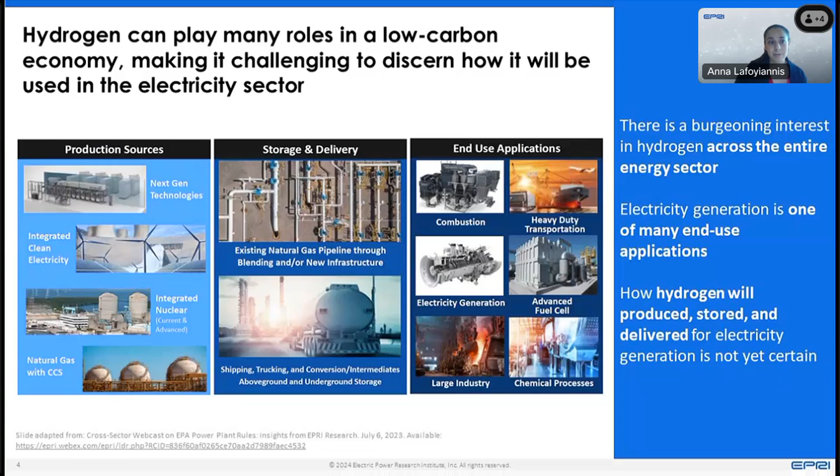And you see that come loud and clear when you start to look at national macroeconomic models. These models inform the potential for hydrogen deployment across numerous studies. I've only listed two here, but you see this all over: there is definitely a significant role for hydrogen in our economy, especially for hard-to-decarbonize sectors—think of something like steel production. But how much hydrogen, and its purpose, depends on the scenarios. There are a lot of uncertainties about cost and availability of supporting infrastructure, so it can get really confusing to look at these models and know exactly what that means for us.

And that's really the heart of our paper, because we really wanted to get a little deeper into what that means for us.

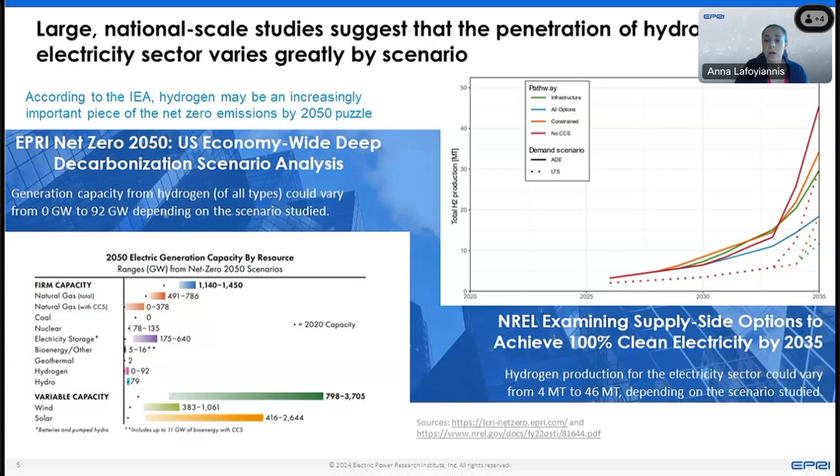So I'm going to go to the next slide and talk a little bit about some of the ways that hydrogen might be used. I want you to start thinking about where are those synergies, and what could we see in those macroeconomic models and what that might mean for my territory.

From those models, you see a number of technology options for hydrogen, and it's not just clean electricity. You can use hydrogen directly for ammonia production, steel - I'm in Ontario, so I'm all about steel - marine shipping, and aviation. These derivatives, because hydrogen is so light, can be incredibly useful for transportation. So wherever you are, you might be seeing some more uptake on hydrogen because of these other industries and economies in your region.

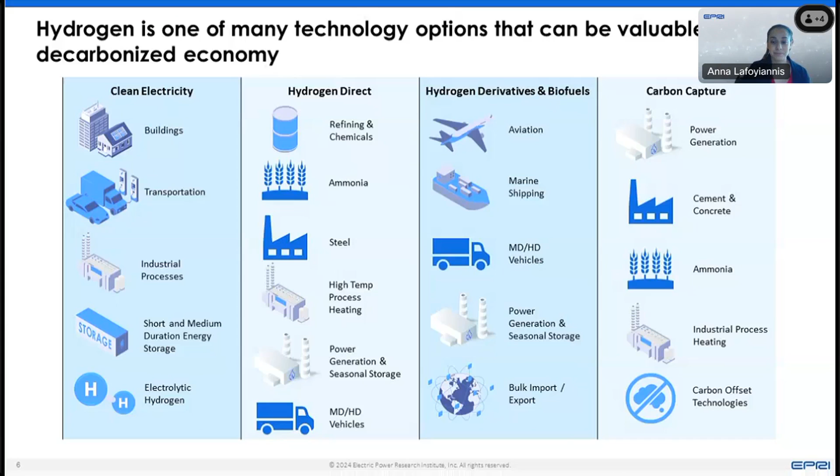These are a few diagrams telling you a little bit about why there's so much hype. It's hard to go a day without reading something about hydrogen, and it's because the momentum is really, really strong. These sources I pulled from the IEA and from the Hydrogen Council, and no matter the source, you don't have to be super specific about the numbers, but what you see is that the number of projects has grown over the last few years and continues to grow.

You'll also note that the majority of projects are located in Europe, and that means that we have a lot of lessons that we can learn for those of us in North America from Europe in terms of the deployment and how to model it.

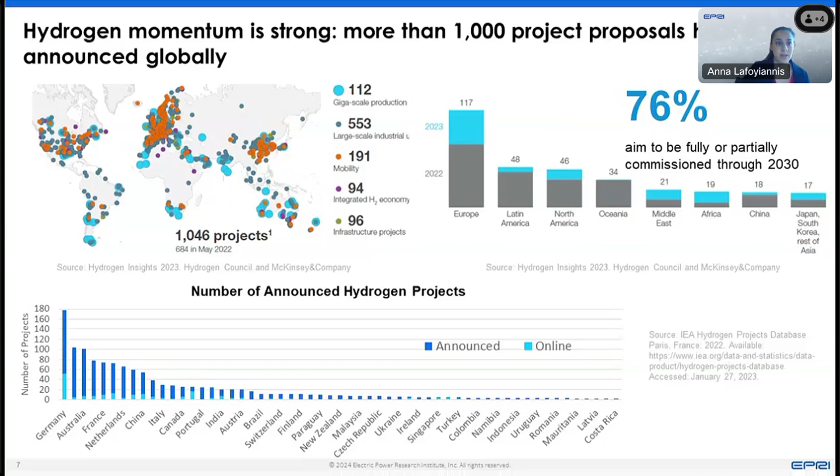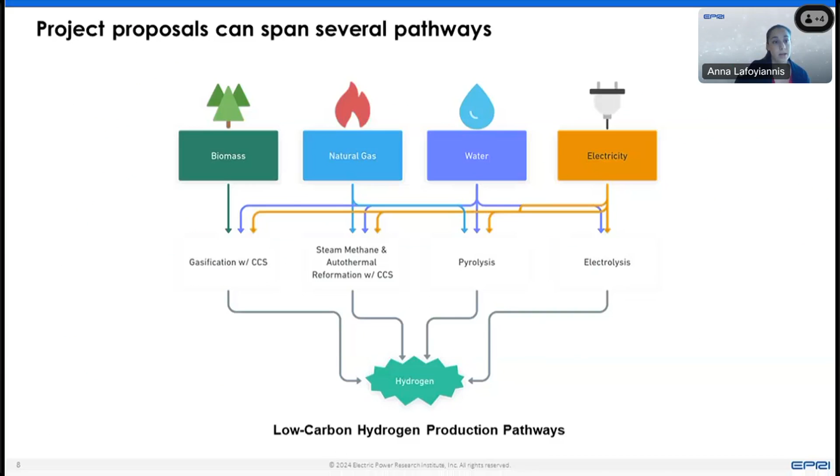That last slide, just a caution - a reminder that you can produce hydrogen a whole bunch of ways. So if you're grabbing information, you can't just assume that's going to come from electrolysis, because there's a whole number of ways. In particular, we see blue hydrogen, that's natural gas using steam methane reformation, and then attaching carbon capture. So another way of making clean hydrogen.

So just to say that, if you were to look at today's information, you might think that there's going to be a lot of blue hydrogen, but the deployment of electrolysis has grown. I love the picture on the left when you start to look at that growth, more than doubling from 2019 to 2022. And I'm sure as we start to see numbers come through for 2023, 2024, and so forth, you'll see it grow everywhere in the world.

So a large amount of growth is coming in North America - it may very well surpass the growth that we've already seen in Europe. But also in Asia Pacific, in the Middle East, and Latin America, we see this potential.

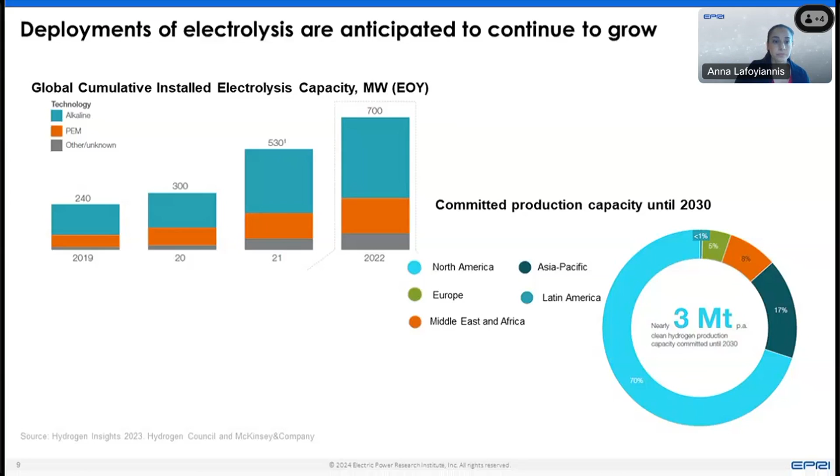All right, so we've got this electrolytic hydrogen - it's likely to grow. Okay, what does that mean for the power sector? One way of looking at this is to look at integrated resource plans, and look at how the utilities are looking at it and see what their perspectives are. And last year, I did a little study

looking at 115 integrated plans across America. I wanted to know whether they've incorporated hydrogen in their plans as an option, and what benefits they might think there are. What I found is that it's very early days - only 33 list hydrogen as an option in their utility planning process. When they do, it's primarily to replace coal or gas units, so vis-a-vis, you're thinking about emissions reductions. But they also acknowledge that it could be an important piece of the puzzle for a lot of grid services.

And flexibility is certainly one of those, listed by many, but also long duration energy storage - think of that shifting from season to season, talking about it as a resilience or fuel diversity benefit. So in short, they want to reduce their emissions and they want to ensure they have a dispatchable resource to support system reliability. Some people call this a unicorn, but maybe it's hydrogen.

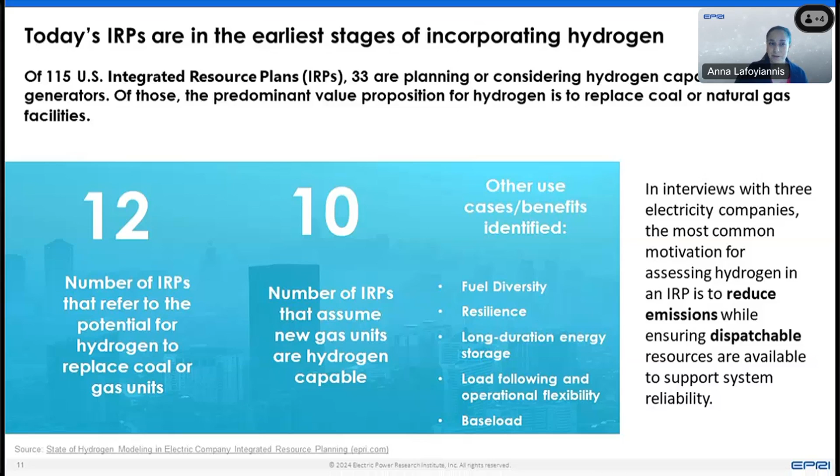One of the things that I didn't see in this review, and I always think about what the gaps are, is the nonlinearity of hydrogen to emissions reductions. And the reason I thought this was kind of curious is that a lot of these have talked about the potential to use hydrogen blending - what a cool option, to use a fuel and blend it with natural gas as a transition.

Like I said, that nonlinearity didn't show through. So for a utility to get the most benefit in terms of emissions reductions, they will need to factor this nonlinear curve into their modeling. They're likely going to find that they need to blend a significant amount of hydrogen into their gas units to get the most emissions benefits, and this might take some time.

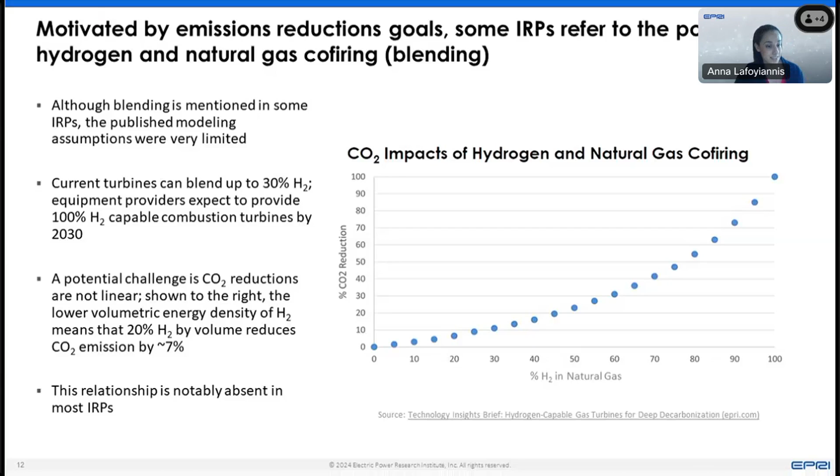So let's talk about policy in context. I think it would be really incomplete if I didn't talk about this wider environment, and I would risk downplaying the role of hydrogen in the absence of talking about policy, tax incentives, and stakeholder interest.

Last year at EPRI, John Beislein did some work looking at the IRA in the US and what it might mean in terms of hydrogen price and deployment. You can see that it can significantly change the types of resource or types of hydrogen that is produced. It might lead to more electrolysis.

Really, what I take away from that is realistically, we're going to have hydrogen in almost every territory. And as long as there is some hydrogen, any power system modeler should be asking: how can I make use of that in a really beneficial way? What are my synergies, and how can I make sure I use it to the benefit of being cost effective and reliable, which is what we all care about.

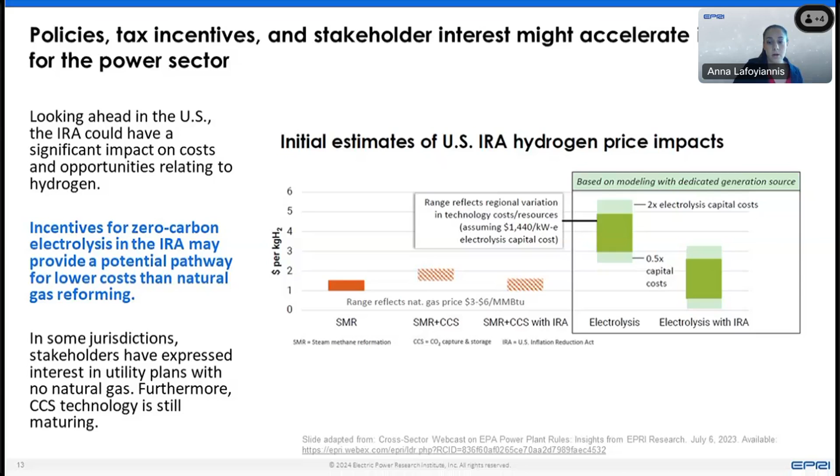At the same time, there's this potential to use hydrogen for other markets. I talked about being from Ontario, and steel is a very important part of the economy I grew up in. If I were sitting in Ontario, I'd be thinking about the synergistic effect I can use—is there benefit and locational benefit from other sectors employing hydrogen, and perhaps getting flexibility from hydrogen production, using it as a demand flexibility resource? So we have to shift and understand that all of this means there's going to be different ways of modeling depending on your territory and how it's deployed by everybody else.

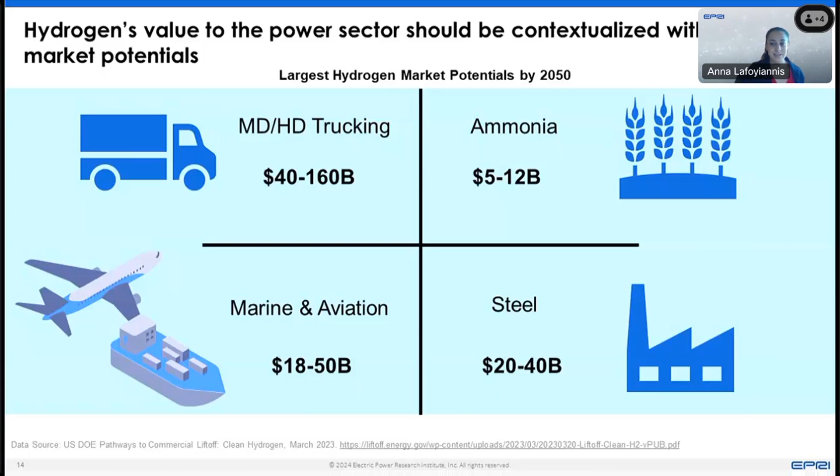So you get one last slide from me before I hand it over to Maren. She's going to dive a lot deeper, but I think this is the most exciting part.

If you haven't already read, ESIG now has two reports about hydrogen, with a few really important quotes that get me so pumped. Most importantly, hydrogen can provide much needed flexibility to the system when other carbon-free resources are not available—think of them as a peaker, think of what they could do during dark doldrums or those reliability events that get a lot of us nervous. As a result, it might be the key to reaching 100% net zero electricity power supply.

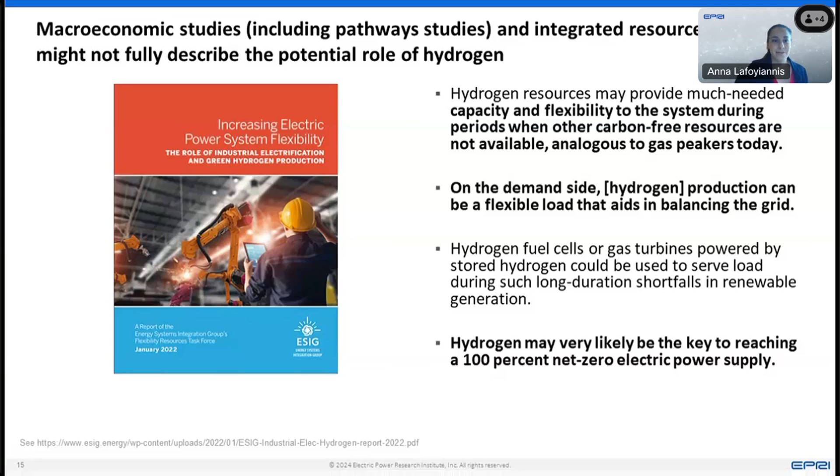My goodness, how exciting. So with that, I'm going to hand it over to Maren to talk about how to do this. Thanks so much, Anna, and thanks for the nice introduction.

In this section, we want to talk about some of the key takeaways from our report—feel free to go to the ESIG website to check out the report itself. What I want to talk about here is what you should be considering when modeling hydrogen, what types of flexibility to consider, what could be the role of hydrogen in the power sector, and lastly, more recent work on possible participation models for hydrogen.

Starting with the next slide, I wanted to give an overview of the types of models we're talking about in general. In power system modeling, there are a lot of models involved, and they typically answer specific questions. For example, we have large-scale pathway models that look into the future, trying to get a good view of the economy at an economy-wide level, taking into account things like hydrogen policies or tax benefits and how those may impact technology choices.

Those technology choices are then typically picked up by a capacity expansion model, which focuses on a more granular level in a smaller geographical area, including more detail at a unit level. But as you can imagine, those models are rather computationally expensive, so they're typically not equipped with a whole lot of temporal granularity or detail.

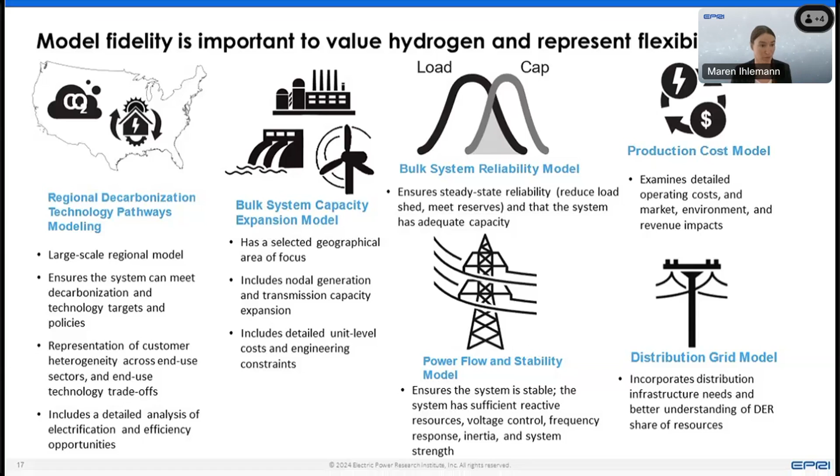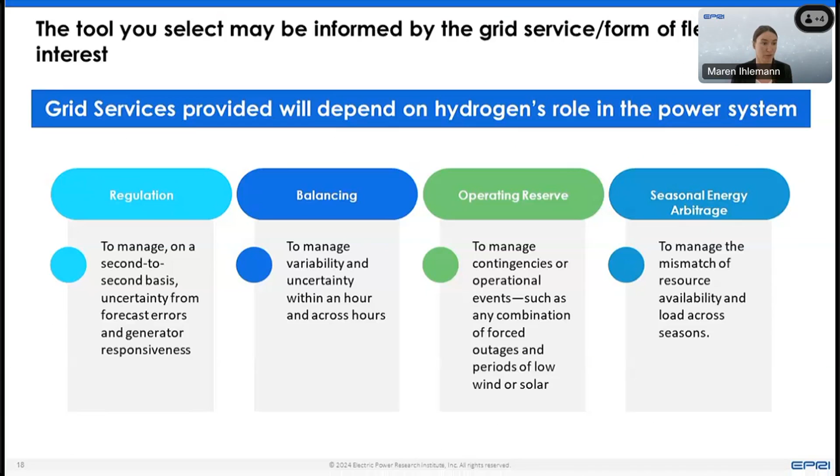On the next slide, I quickly summarized what kind of flexibilities we were talking about in our report, which range from regulation flexibility on a second-to-second basis, to balancing provisions, operating reserves, and then on the other end of the spectrum, seasonal energy arbitrage. This will depend on what role you want hydrogen to play in the power system, or what you identify as the role of hydrogen for your system. And the role of hydrogen may actually not be so clear.

Thanks, Anna. Next slide, please. What we quickly found when working on this report is that not everybody is necessarily speaking the same language.

Some people talk about what we label here as exogenous hydrogen demand, where we assume hydrogen is produced via electrolysis but then used elsewhere outside the system boundaries. The opposite is also found in some studies: exogenous hydrogen supply, assuming similarly to natural gas that hydrogen is part of the power system and can supply fuel to thermal generators. Lastly, bringing it together, we have endogenous hydrogen demand, where hydrogen is produced through electrolysis, stored and/or transported, and then brought back to the power system to provide power at a later point in time.

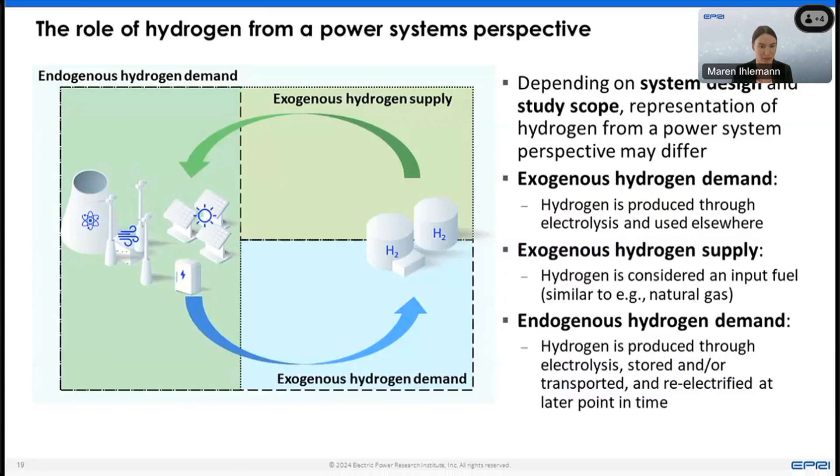Let's look at those concepts in more detail. I'll start with what we call exogenous hydrogen demand, where electrolytic hydrogen is produced and used elsewhere in the economy. We can realize this in our models, for example, with simply a demand time series, or possibly a price profile to incorporate price responsiveness, so we only produce hydrogen if it's economically meaningful.

Often electrolysis is also talked about as a flexible load. In this context, it could provide services like downward reserve by increasing hydrogen production, or upward reserve by decreasing production to alleviate system stress. As a teaser for later in this presentation, these flexible operations will highly depend on the electrolyzer type you have at hand.

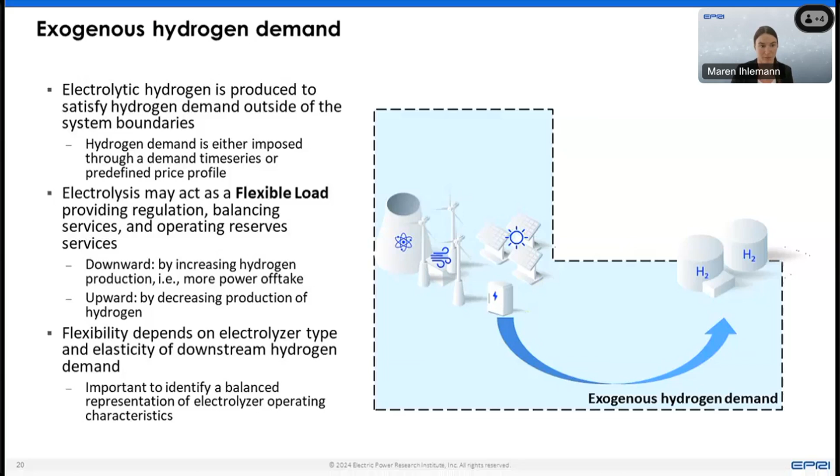So Anna will give us a brief overview of the key electrolyzer types and what the key differences are from a technical perspective. Moving on to the exogenous hydrogen supply.

I won't spend too much time on this, but basically we can think of this a lot like a thermal generator, so from a modeling perspective the challenges should be rather small. It's actually found in quite a few integrated planning models—another teaser to some of Anna's previous work reviewing integrated planning models, so feel free to reach out to her if you want to know more.

From a modeling perspective, the only real thing to worry about here is how we can track hydrogen in case we want to look at its concentration within existing infrastructure—for example, how much we want to blend, and how we can make sure that's enforced.

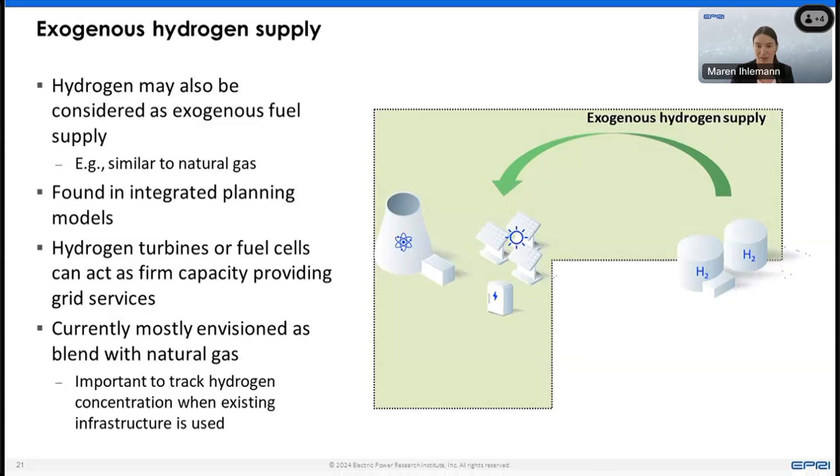Bringing it all together: the endogenous hydrogen demand. Here, hydrogen is produced through electrolysis and then serves as a fuel supply for the power system later on—hence endogenous. This means we bring all the different concepts we talked about together, but we also have an additional challenge, because now we need to worry about storing that hydrogen.

From a modeling perspective, this isn't necessarily easy, because often models don't have a long look-ahead horizon. For example, a production cost model may only look one or a couple of days ahead, so it's really a challenge in how we want to address this going forward. If we want to dig deeper, there are also questions around how we want to represent storage, transport, and other processes.

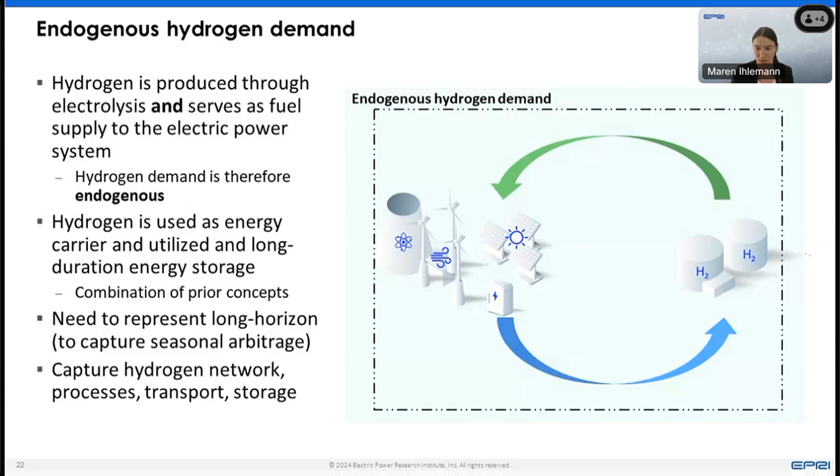So I'll bring this part of the presentation to an end by talking about possible additional modeling considerations, which are also discussed in the report. I'll start with representation of uncertainties.

We split this up into two different challenges. On one hand, we have short-term uncertainties, where we're looking at renewable energy resources and load profiles, and depending on the specific scenario we're looking at, those may differ.

Those will then possibly also heavily impact how efficient hydrogen can be used to provide flexibility, and it may possibly decrease or increase how much should be invested in electrolyzers.

On the other side, we have the long-term uncertainties, so seasonal uncertainties and seasonal variability. If we are imagining hydrogen would provide that seasonal arbitrage, we need to ask ourselves what are the possible realization scenarios we want to look at, to make sure that at the end of the year or season we're also able to deliver hydrogen when we need to call upon it.

There are also some things to be said about locational aspects, where it may play a role. For example, if we have an abundance of variable renewable energy sources somewhere, this will likely be a location where hydrogen may be cheaper, in which case we should be worrying about how hydrogen is transported, and then if you want to leverage existing gas infrastructure, how can we limit the blends of hydrogen, and how we can track those molecules.

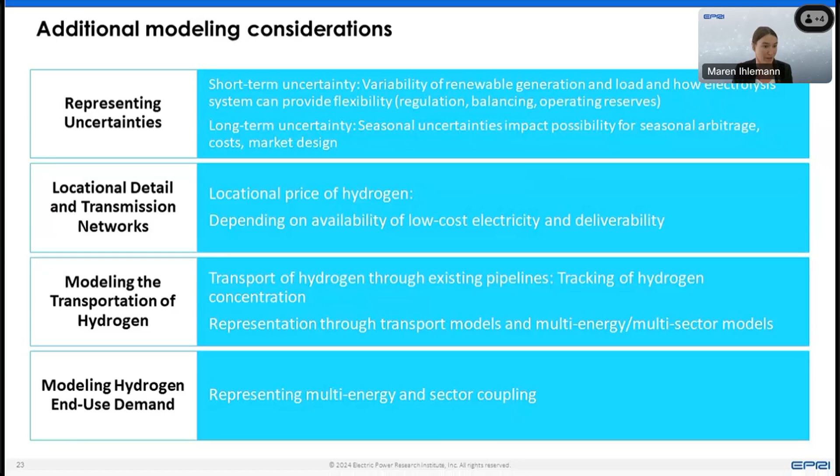Now, typically resources don't operate in silos. They typically participate in a market, which is why we've recently picked up some work on looking at possible participation models for hydrogen resources. This is ongoing work, but we're hoping it will be a nice teaser for a report that we'll be publishing hopefully soon.

But in general, just a quick primer on what we mean by participation models. FERC defines it as a set of tariff provisions to accommodate participants' specific physical and operational characteristics. Now, if a resource has specific requirements—for example, an electrolyzer having specific needs—there may be a revision to those market rules to accommodate those physical and operational characteristics, in order to facilitate that resource participating in the market. And EPRI adds to this discussion by saying that we will also need to make sure that those market clearing software products, the software itself, is able to handle that.

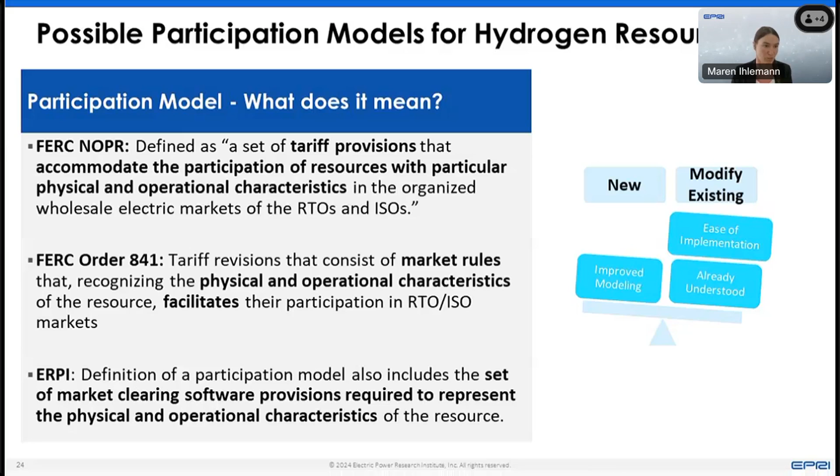So the concepts that I will present in the next slides are just analogies to existing participation models and how they may be used to represent hydrogen resources. I'm starting out again with looking at the exogenous demand first, and then I'll later move to the endogenous demand. So the first analogy is a flexible load participation model, which makes sense, as de facto the electrolyzer would be an electrical load to the system.

So it's intuitive. It's, however, challenging to incorporate all the technical detail that an electrolyzer may need—thinking about minimum up and down times, ramping limits, startup and shutdown processes. So that's a possible shortcoming that would need to be addressed. The other aspect is the lack of linking constraints between flexible demand and variable renewable energy sources.

What I mean by that last bullet point is specific to possible tax credits and requirements that come with this. For example, if your hydrogen is supposed to be green hydrogen, it will need to be produced from specific variable renewable energy sources. So, in order to capture that in a market clearing, you would need to impose such a constraint.

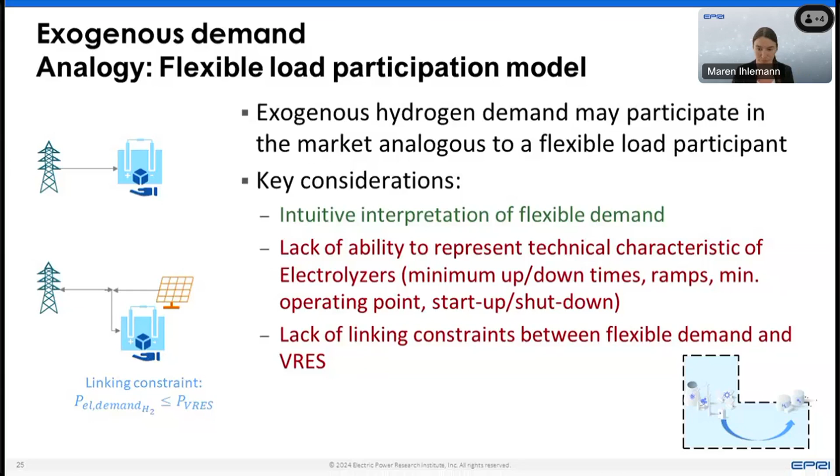Moving on to the next slide, a very similar idea, but the other way around: in this case we think of a thermal resource participation model. If we think of an electrolyzer as some kind of negative conventional generator, we have a lot of technical parameters that we can just use to represent those electrolyzers, which is great, but it may be a little less intuitive, as we're having an offtake rather than an injection. And we're running into the same issue we saw before with flexible demand, that we can't represent those linking constraints.

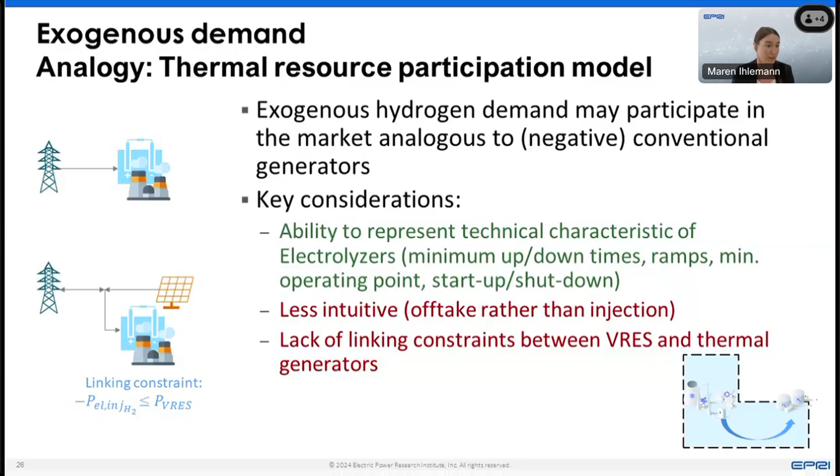If we look at the endogenous demand, on the other hand, we're thinking of hydrogen as an energy carrier—basically a storage—which makes it interesting to look at from a perspective where we're assuming it's analogous to battery storage, which has a couple of benefits. On one hand, we have the linking constraints between charging and variable renewable energy sources that are already in place when we're thinking about hybrid resources, so that's a benefit. We can also think of hydrogen inventory as something conceptually similar to a state of charge.

And then, on the downside of this participation model would really be the technical detail. So while we have some technical detail to represent charging and discharging, there's still other aspects that we cannot incorporate, which we may need to want to incorporate to represent, on one hand of the conversion chain, the electrolyzer, but also now on the other side, maybe a hydrogen turbine.

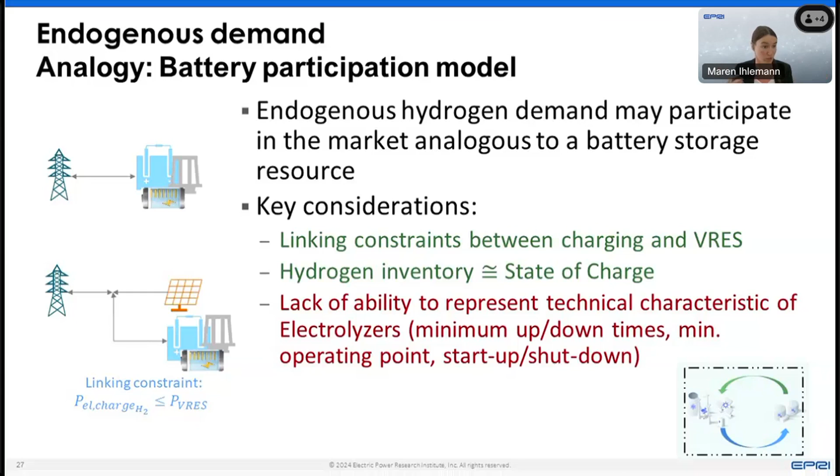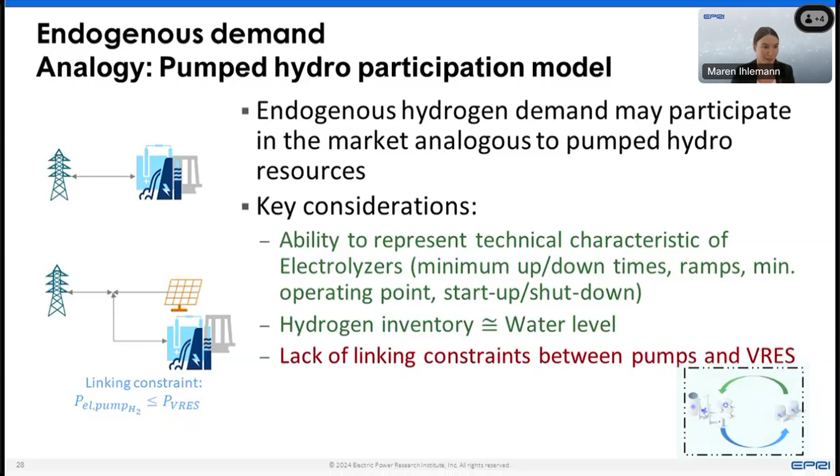So those are just some thoughts that we have at the moment on participation models. We'll go into more detail on this in our report. So leaving you with the cliffhanger and passing it on to Anna to talk about electrolyzers and technical details on those.

Thank you. I'm mindful of time, so I will be relatively quick on this because a lot of the details are in our report and there's a lot more. Most importantly, the representation and the techno-economics of hydrogen are changing so quickly that I am hesitant to give you a number to use, because it will change tomorrow.

The first thing to know, from the EPRI report, is that how you represent hydrogen plants depends on what electrolysis technology you use. There are 4 technologies listed here: alkaline, PEM, AEM, and SOEC. So 4 different technologies, each with their own characteristics, each at varying levels of maturity.

The most mature is alkaline, the second most is polymer electrolyte membrane. If you are modeling and looking at just what you can do in the next year or two, you can simplify and just look at those. But if you are looking into the future, you open the door to a lot more exploration of these newer technologies, and those technologies have some significant and profound impacts for flexibility, which I'll get to a little later.

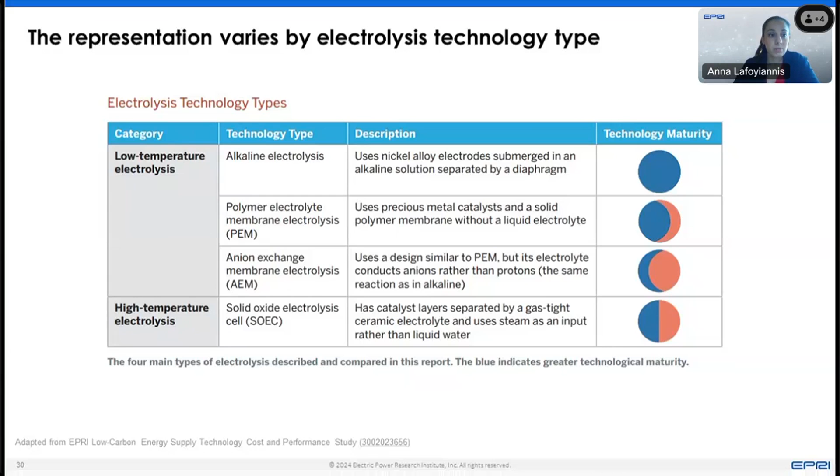Before I get there, it's always important to look at cost, and part of cost is also lifetime and replacement. So when we think about electrolysis, capital costs vary by technology type. Put simply, the more mature the technology, the lower the cost — no different than any other technology. So you see the same kind of trend.

What is also really important is the electricity costs. In our report, we talked a lot about this, but making sure that you have really accurate modeling of electricity costs, with detail there, is very important for assessing hydrogen.

When you look at something that's maybe longer term, you want to also consider stack lifetime, because the electrolysis system consists of a stack that would be replaced, and that is the highest cost item, your biggest ticket item for a hydrogen plant. So in terms of your capital costs, replacing that stack matters. Unsurprisingly, the more mature technologies so far also have a longer stack lifetime, or in the case of anion exchange membranes, AEMs, those we just don't know because they are less mature technologies and have yet to be deployed at scale.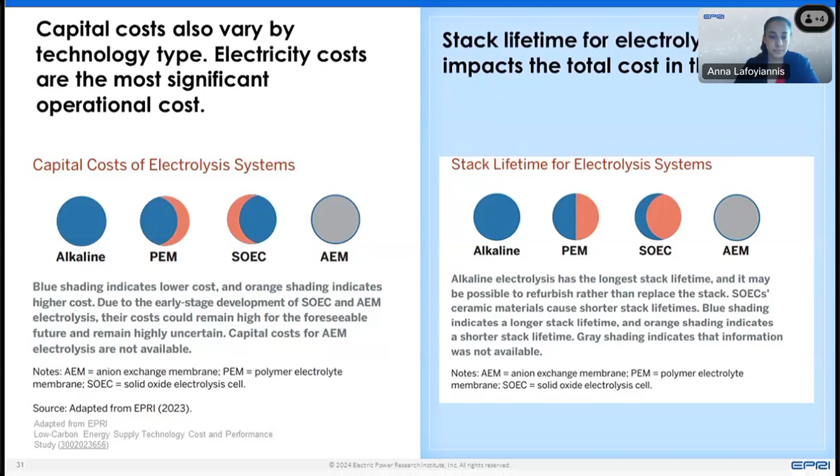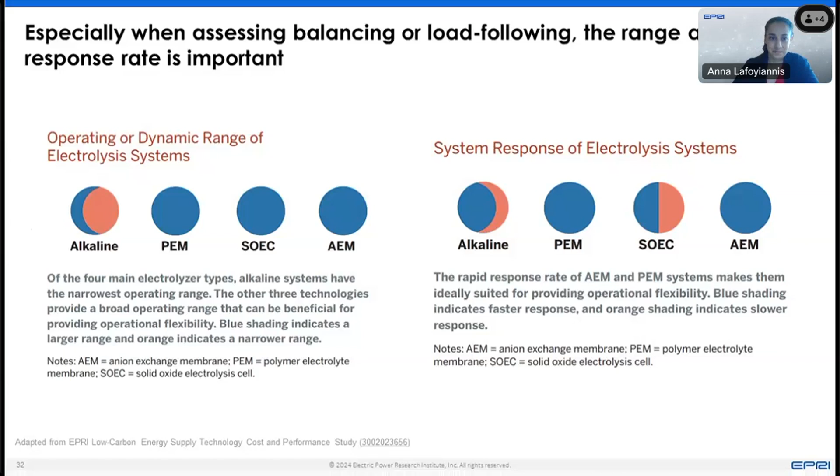So those are just a couple of really important things to think about. We pulled it all together, and this comes from the summary of the report we've published, grouped into 3 areas. And while we don't have the answers — there's very limited comparative analysis of different modeling techniques — as we explore, there are so many different ways of thinking about hydrogen, what it could mean in your system, that synergy with other economies. What is helpful, I hope, is just a simple framework: what are the questions to ask?

So my apologies for not having answers. As I said, I'm not as impressive as Jason made me sound out to be, but there are 3 ways to look at them.

First is, what do I need? What is important in the power system market that I'm in? Are there grid services that are important? Am I thinking about doldrums and long duration storage? Am I looking only next year, or am I thinking about 2040? Am I looking at a policy environment that's highly decarbonized? What operating regime tells me, is it endogenous, exogenous? What participation model should I be thinking through?

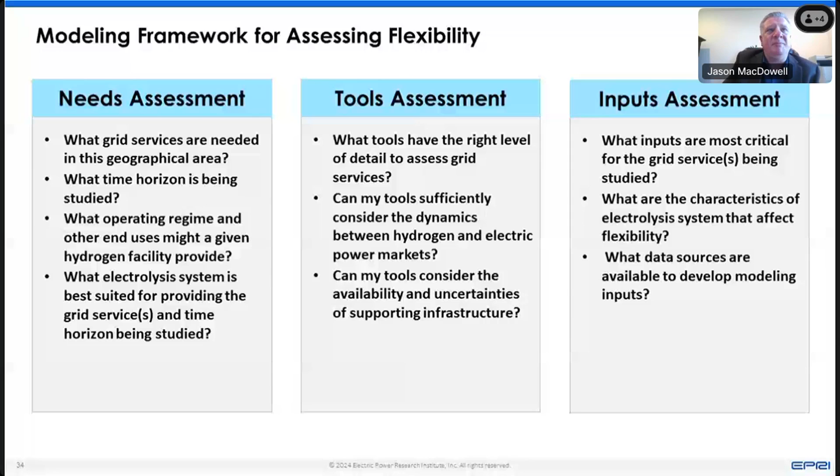So that was an easy question. I'm going to hand this over. The first question, this was asked about 15 minutes ago. And Anna, I think you might have touched on it in some of your latest slides, and when you went through the conclusions as well. The question is, why would hydrogen be the first solution to anything where it's a 4 watts in versus a 1 watt out type process? I think they're alluding to efficiency there. Everything else would be more efficient. Can you elaborate on that a little bit more? Some of these questions too, we'll do our best to answer right now, and then we can follow up with anything we need after to elaborate, and we'll email those answers out as well. So who'd like to take that first one?

I'll take it. I think it's a really good critical question. Hydrogen is not that efficient to use. That's a fact. If it was, we would have been using it by now. But if we look out long into the future, we start to lose options for what could be a flexible resource that is also low emitting. And in conditions where you have very limited options, especially in jurisdictions that may not allow carbon capture, then you start to see more electrolytic hydrogen get picked up by these models. But what you also see, and this is why we harp so much about other sectors, other sectors might be harder to decarbonize, right? People call those hard to decarbonize sectors, you think of the steel industry. So they are likely to use it despite its inefficiencies. And so if they're using it, then I might be a little less concerned about the efficiency and more just like, can I get it as a flexible load for the power sector for those few times that would be beneficial for me?